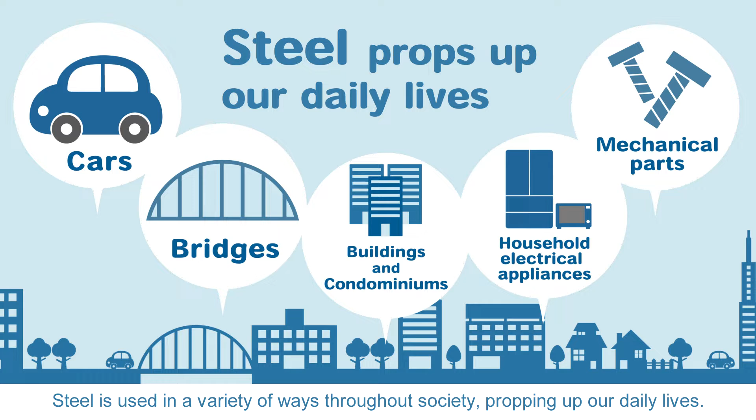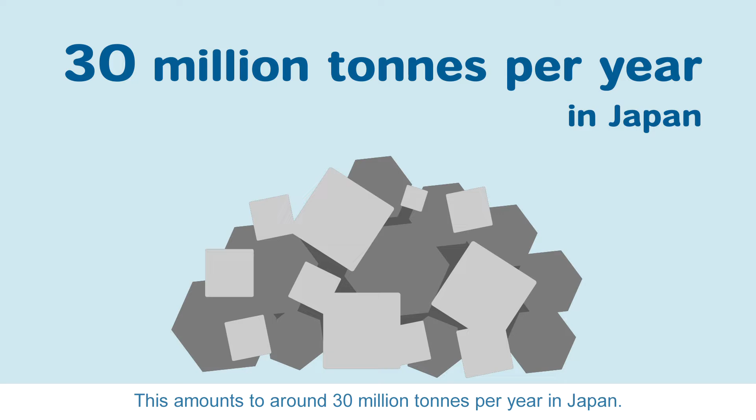Steel is used in a variety of ways throughout society, propping up our daily lives. Steel that has served its purpose and is no longer needed is discarded as scrap. This amounts to around 30 million tons per year in Japan, enough to fill 3 baseball stadiums. It will continue accumulating unless something is done about it.

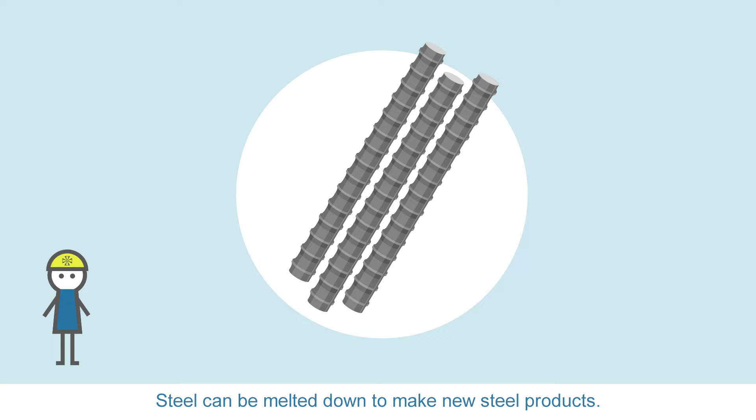But there's no need to worry. Steel can be melted down to make new steel products. Its properties do not deteriorate, so it can be recycled over and over again.

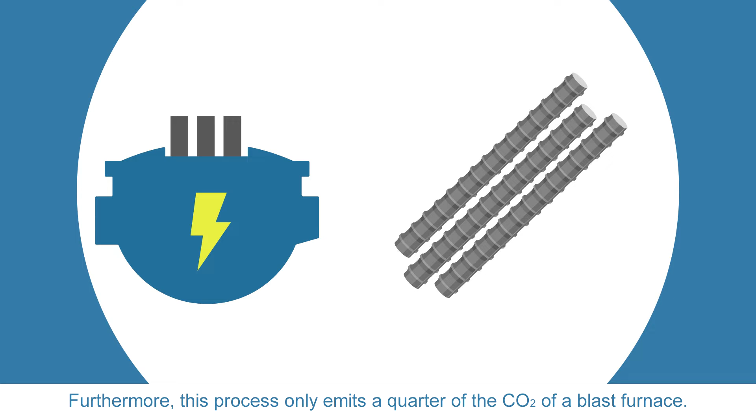What's needed is an electric arc furnace. Electricity is used to heat the scrap steel to several thousand degrees Celsius to melt it. Scrap steel may contain impurities, but they are removed during the production process, allowing it to be recycled to make new products. Furthermore, this process only emits a quarter of the CO2 of a blast furnace. The recycling of steel in electric arc furnaces contributes greatly to the realization of a sustainable society.

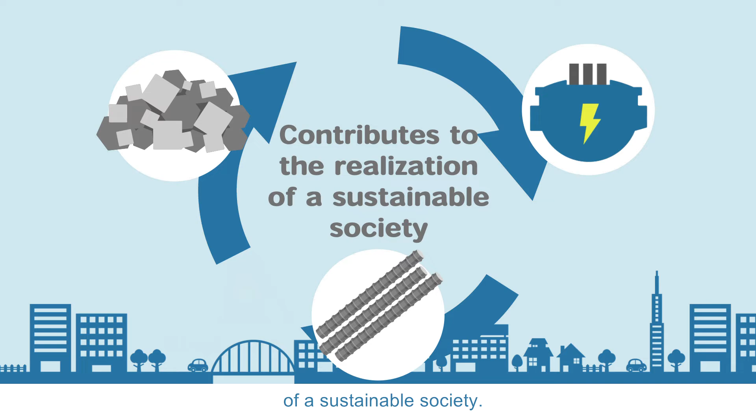Kyoei Steel has been operating businesses centered on these electric arc furnaces for over 70 years. Kyoei Steel has built its businesses founded on the corporate philosophy of the spirit of challenge. Our businesses can be divided into 3 main sectors: domestic steel, overseas steel, and material recycling businesses.

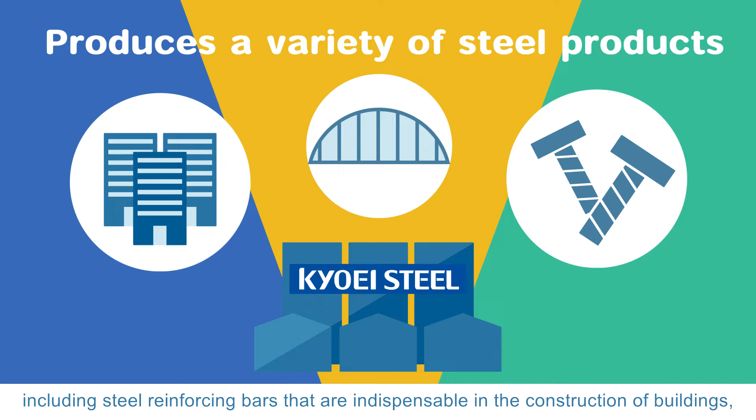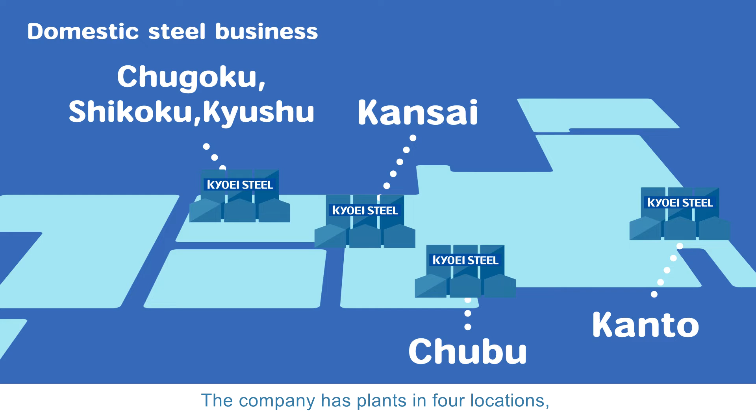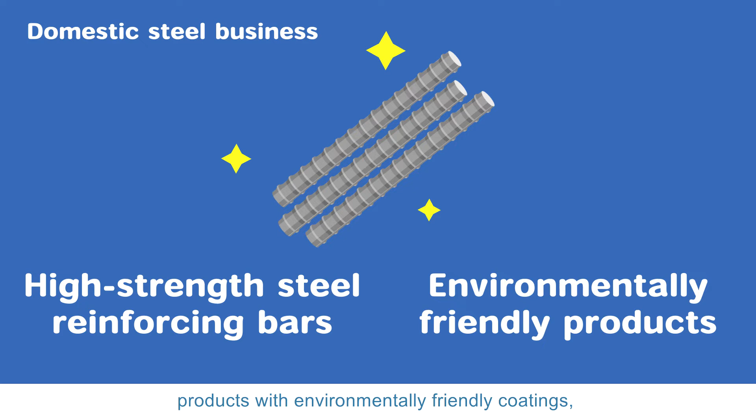Our group produces a variety of steel products, including steel reinforcing bars that are indispensable in the construction of buildings, condominiums, bridges, and so on. The company has plants in 4 locations and holds the #1 share of the domestic market for reinforcing bars. We also deliver high-strength steel reinforcing bars, products with environmentally friendly coatings, and a variety of other products to meet our customers' needs.

We operate businesses in Vietnam, the US, and Canada. In the 1960s, we became the first Japanese steel producer to expand overseas. The company continued taking on challenges to expand from a small local factory to becoming a global company. Overseas shipments have now overtaken domestic shipments.

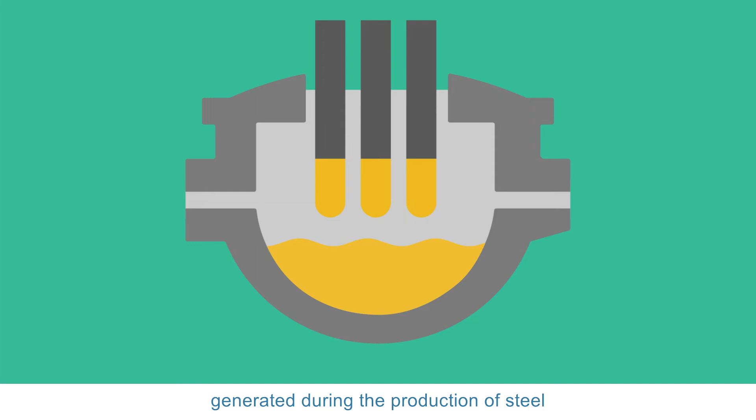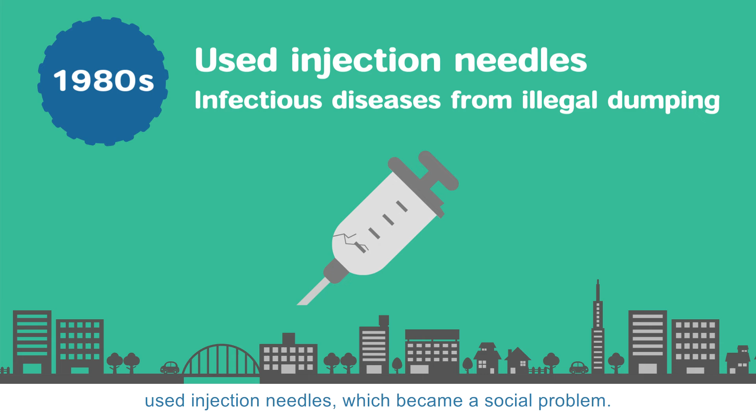The material recycling business is a business that is unique to our company. Heat, up to several thousand degrees Celsius, generated during the production of steel is used to melt and detoxify medical waste and a variety of other industrial wastes. The launching of this business in the 1980s was prompted by incidents of infectious diseases from illegally dumped, used injection needles, which became a social problem. The strong desire to somehow find a solution to this problem led to the making of steel, while simultaneously treating wastes, giving birth to a new business.

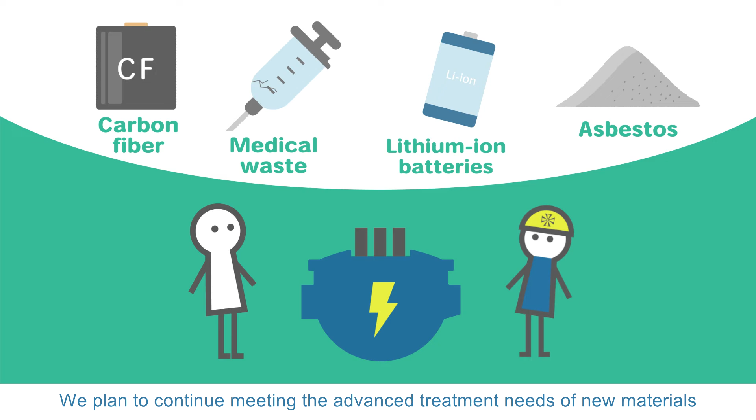Electric arc furnaces ensure the safe treatment of materials that are difficult to treat in an incinerator. We plan to continue meeting the advanced treatment needs of new materials that are created as the result of progress in technology. Based on our spirit of challenge, Kyoei Steel has also continued striving in the challenge to coexist with the global environment.

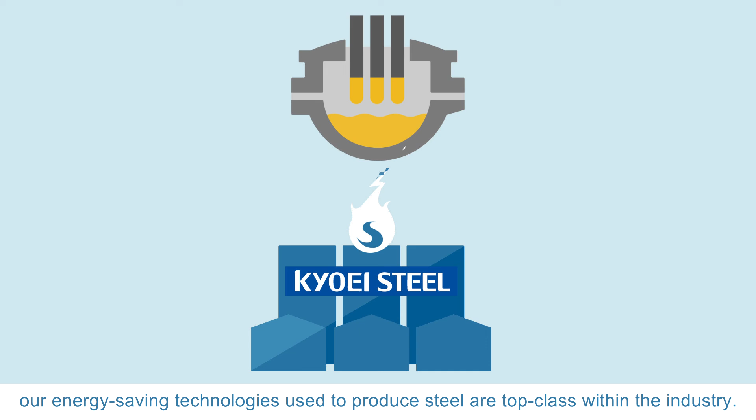All the water used to operate our factories is recycled. No polluted air is discharged to ensure the environmental friendliness of our operations at factories. Furthermore, our energy-saving technologies used to produce steel are top class within the industry. We are even implementing measures to further reduce CO2 emissions with the aim of realizing carbon neutrality.

We strive in search of what we can do by recycling steel resources, and the challenge will continue for Kyoei Steel Group. The spirit of challenge. Kyoei Steel.